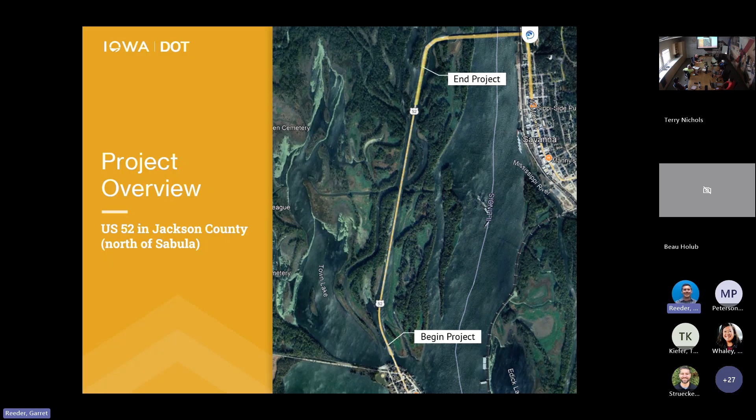Project length is about 9,500 feet long, and we have water on both sides of the roadway, and that water depth really varies throughout the project limits. We did do a bathymetric survey early in the design phase to figure out what the water depths were, and those varied from a few feet to several feet deep in spots. It's not very consistent whether you're on the east or west side of the roadway, or running north and south. A lot of variability in water depth, so just want to point that out as we talk through constructability. That's something to keep in mind.

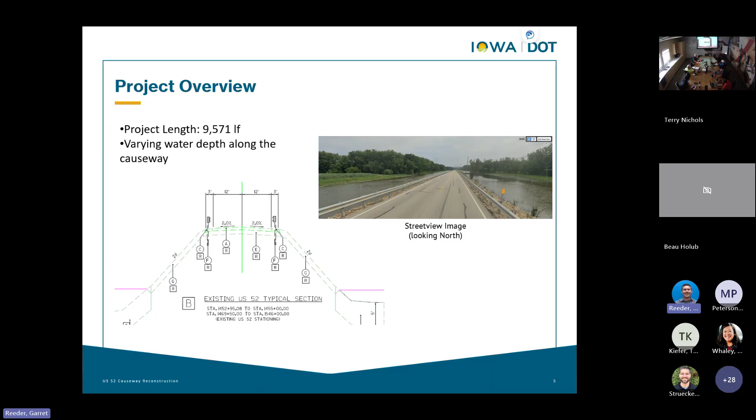With this project, what we're planning to do is widen out the causeway. Thinking back to that existing typical section, there wasn't much shoulder out there—we're going to widen things out to accommodate full 8-foot shoulders, replacing the pavement with full depth 10-inch PCC with full depth shoulders as well. To accommodate that widened embankment, we're going to use a lot of Class B revetment as the foundation, which will also help armor the fore slopes for any wave action or erosion based on water levels.

This typical section was included as part of the meeting invite, so feel free to open it up on your screen. I'm not going to run through every callout on this typical, just going to give a few highlights to spark some discussion later in the meeting.

We have 10-inch PCC pavement with full depth shoulders on this project. We're proposing a 12-inch modified subbase underneath that pavement, with geogrid underneath that subbase, and 12 inches of cement stabilized subgrade beneath the subbase. So we're trying to beef up the typical section a bit to provide a solid foundation for that pavement.

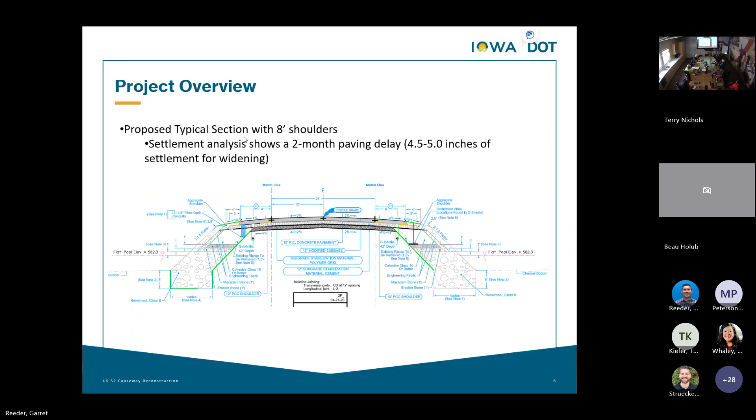This conduit trench detail was included as part of the meeting notification, so feel free to open it up to look at a few more callouts. Our thought was to get that conduit trench constructed first, allow the utilities to pull the fiber, and then the contractor would be able to work on widening the east side of the embankment by getting those poles removed. That's how we're currently proposing to address the utilities on the project.

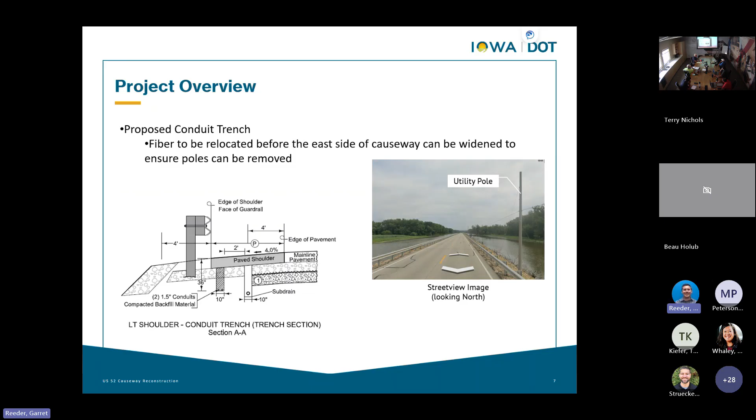And because of the length and the widening that needs to take place, we're looking at some pretty substantial quantities on the project.

Some of these quantities have already been posted online, so some of these items might not be a surprise to a lot of you, but some notable items we thought would be useful to share today: we're looking at about 124,500 yards of waste on the project, 92,500 yards of contractor furnished embankment in place, 331,000 tons of Class B revetment, which is really the foundation for the widening of the causeway we're going to be constructing, and then 44,000 tons of erosion stone.

Our pavement quantity is currently estimated at 42,500 yards, including full depth paved shoulders. Based on our current staging layout, which we'll share shortly, the temporary pavement quantity is about 8,500 square yards to accommodate traffic during construction. Please keep in mind these are preliminary quantities, but we feel they're pretty representative of what we're going to bid with.

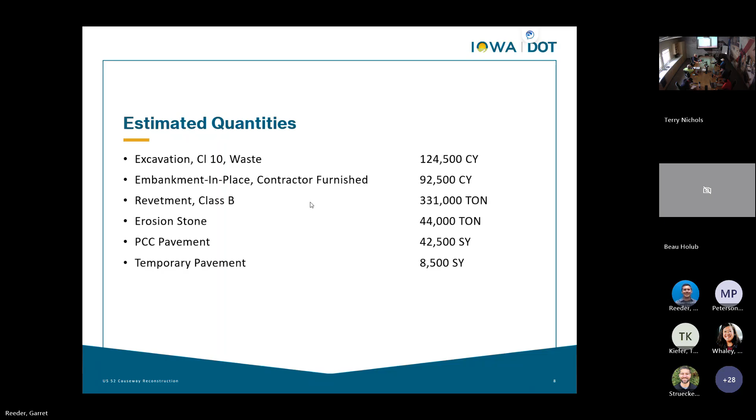So the schedule for this project, like Jesse mentioned earlier, we're proposing a December 2025 letting, which is coming right up. Our design team is in the midst of final design, so any feedback and discussion we get today, we're going to try to incorporate as much as we can into those final plans to help make improvements to the design and constructability of the project.

We've spent quite a bit of time as a design team and DOT team talking about how this project is going to be staged. Right now our current proposed construction durations are looking like 120 working days for grading and 60 working days for paving. That's the current schedule for the project.

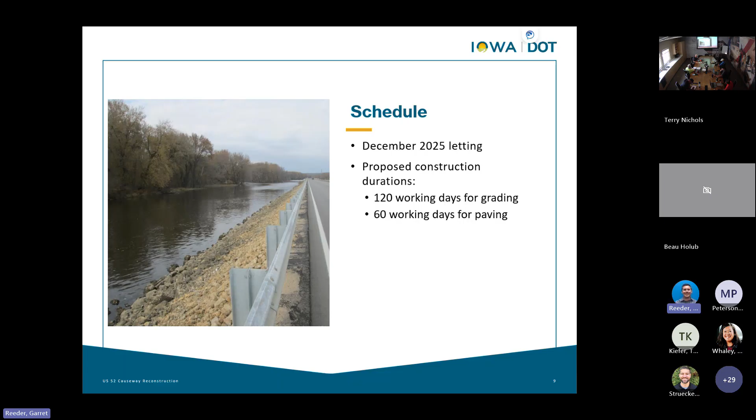And with that, I'm going to turn it over to Tyler at Parsons, and he's going to walk us through a staging overview for the plans. So Tyler, you want to take the screen? Sure, let me grab it real quick here. Okay, let me know if you got me. Yep, we can see it.

All right everyone, so as Garret mentioned, we're going to go over the staging of this project. We have a 2-lane roadway, 1 lane each direction. The main goal of this staging is to keep 1 lane open at all times for traffic to get around. The whole project is 9,500 feet long, so we're looking to substage this into 2,500 foot work zone sections. That way we can go in 4 sections on each side as you go down the causeway, with temporary traffic signals to allow traffic to go around the work zone and keep the contractor working throughout the project. As we go through this, Mark or Garret, please jump in with comments as needed.

We broke it up into 2 phases. Phase 1 is all the earthwork and embankment, basically getting all of the widening done. Phase 2 is all of the pavement work on the back end. The reasoning behind this, as Garret mentioned previously, is that settlement we're working with, and to avoid any settlement issues, we decided to get all the embankment on the outside widening done first. That way we can come back and have everything settled and be able to pave and open lanes on both sides with the shoulders and a lane done at each time, so we're not blocking ourselves in.

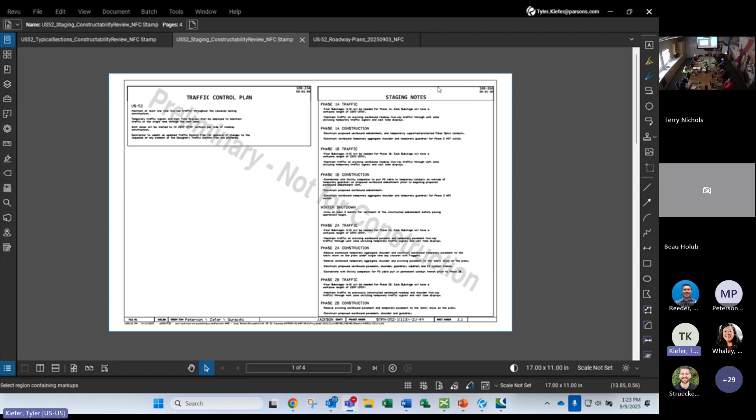So with that, it's a little overview. Let's go through some of these typicals of what each of these phases looks like. So that's the existing, what we're working with today, as Garret mentioned.

In this first phase, with the utilities on the east side, we want to get the west side built out first, so those poles can stay out there as long as possible, so we can switch over once we complete the widening. In this first 2,500 foot segment, this is what the typical section would look like. We'll put traffic on that right lane and have the temporary traffic signals work around the work zone. Through this phase, we are going to build all the embankment on the outside, all that revetment, the widened shoulders, and get it all set up for the paving in phase 2.

With that, you can also see we have the option to install the fiber optic conduits on the outside of the temporary guardrail. That way we don't have to construct the conduit trench and avoid any settlement issues that would come with putting that in too early. So we'll get the conduits on the outside there above grade, and that would allow the utilities to switch the fiber optics onto the west side before we switch to the east side.

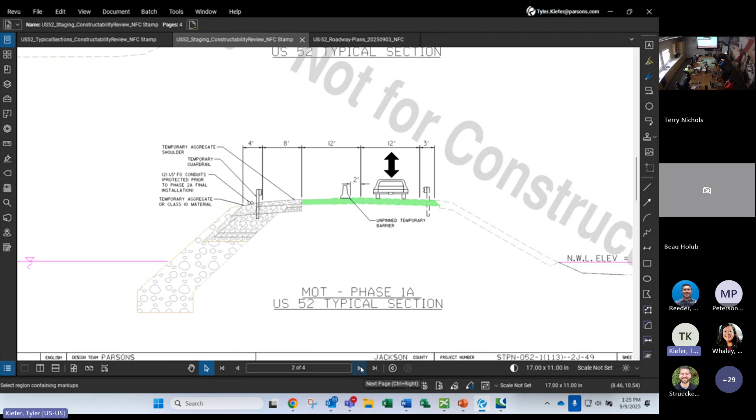So with that, we'll go to the next phase here. As you work your way down the causeway, once the whole west side is done, we'll flip over to the east side, and similarly, we'll do the east side embankment, build all that out, and put all the traffic on the west side.

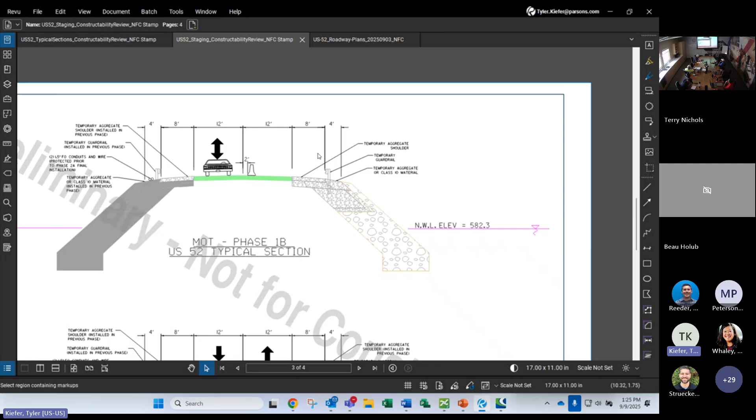And with that, the fiber optic conduit and wire will be pulled onto that side, so the fiber optic service will not be disturbed, and traffic will be running on that side through those short work zones.

And then, depending on how the schedule works, we have a winter shutdown in here to allow for that 2-month settlement. There'll be some settlement plates within the embankment so we can track to make sure we hit the necessary settlement in the embankment on either side before we pave.

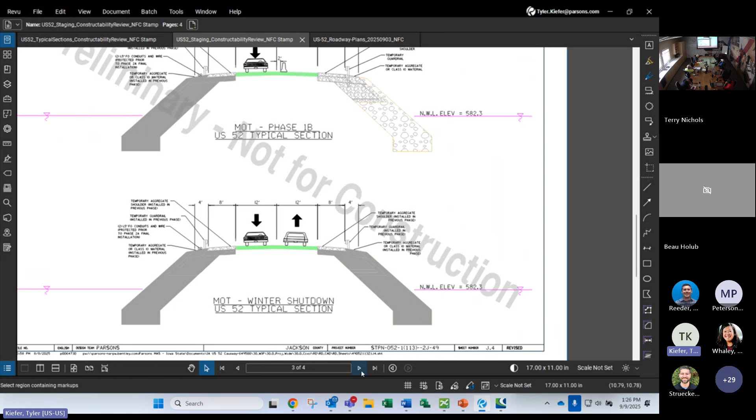And then phase 2 will be all the paving work, and this is where the temporary pavement comes in. So in this first half of the phase, we'll flip traffic back onto the east side, and we're going to pave the west side, both the shoulder and that lane, all in one stage here, as well as include the proposed guardrail and conduit trench.

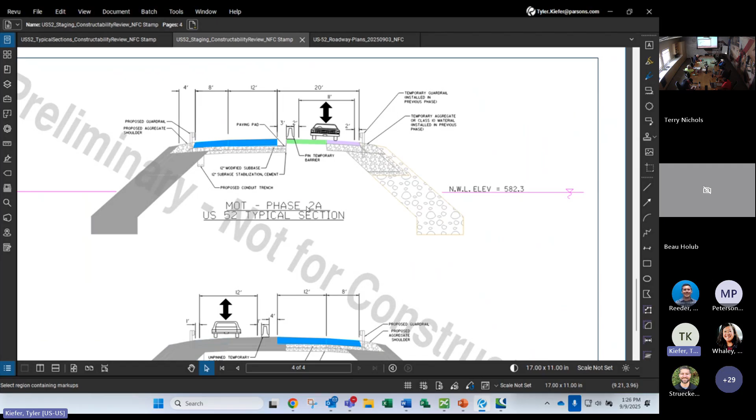And with that, after that phase, we will switch it back over to the proposed side, and the same way, we'll be able to pave the lane and the shoulder on the east side roadway.

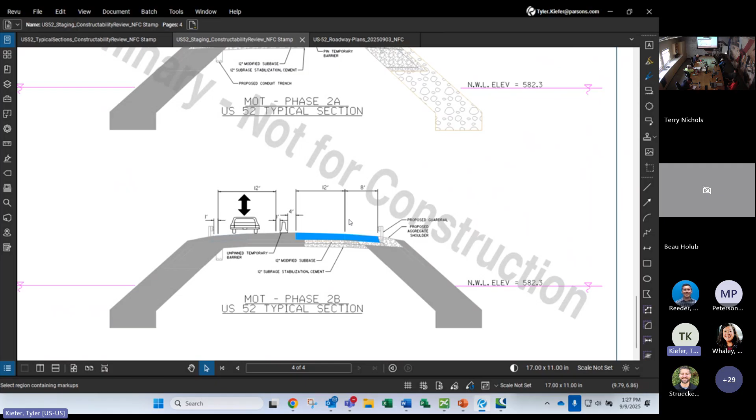So this is just a typical kind of section through the work zone. As I mentioned previously, our work zones are going to be limited to 2,500 feet with temporary traffic signals to allow traffic to continue through the causeway without any disruption.

With that, Garret, Mark, if anyone wanted to jump in or if anyone had any questions through that, I'll toss it back to you, Garret. Okay, thank you, Tyler.

Okay, so we wanted to keep the presentation brief so that we could allow maximum time for discussion. This is where we're going to seek input from our contracting partners in the industry. We have 7 questions we would like to ask, and we're really looking for any feedback, comments, or concerns you have based on the information we've shared today.

We do have plan sheets available as well if we want to take a look at a few things. And we've got our district construction team on the call, and our consultant partners, the roadway designers. We have a lot of resources here that can help answer some questions as we're talking through things, but we're really looking for a lot of feedback and open discussion.

So what I'm going to do is read off the question, and then we'll pause for discussion. Once the discussion is ended for that particular question, we'll move on to number 2, and so on and so forth until we've finished up all 7 questions that we have.

Well, this is Andy, at Boomerang, and the thing that jumps out at me is there's only an 8-foot pad for the semis to drive on in stage 1, and then side dump over the road, over the embankment with their riprap or dirt, and that doesn't seem like enough.

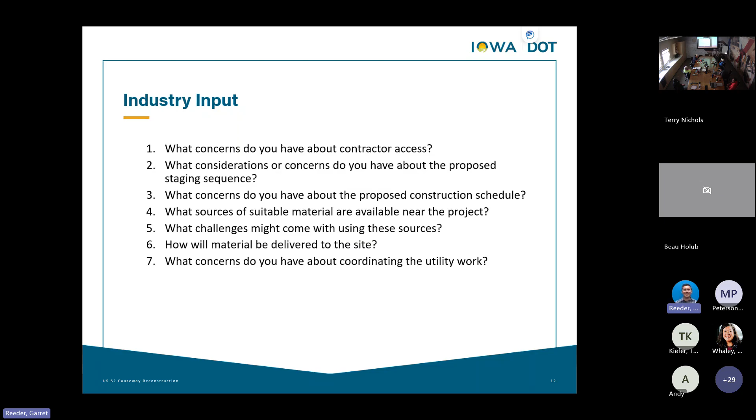Tyler, would you want to bring up those staging plans again, maybe?

Right there in phase 1A, you've got a 12-foot lane, and you're taking 4 feet up with the TBR. So you really only have 8 feet of paved roadway there for semi after semi, side dumping over the embankment if we deliver in semis. If we deliver in tandems, I don't know how they do it.

Any thoughts from the team on that comment? Which would really be a lot.

Maybe a question for you. How much room do you think you'd need for a side dump? What would be ideal? Oh, 10 to 11 if we don't break off.

So can we narrow up that driving lane from 12 to 10 or 10 and a half, or move it over a little bit closer to the guardrail?

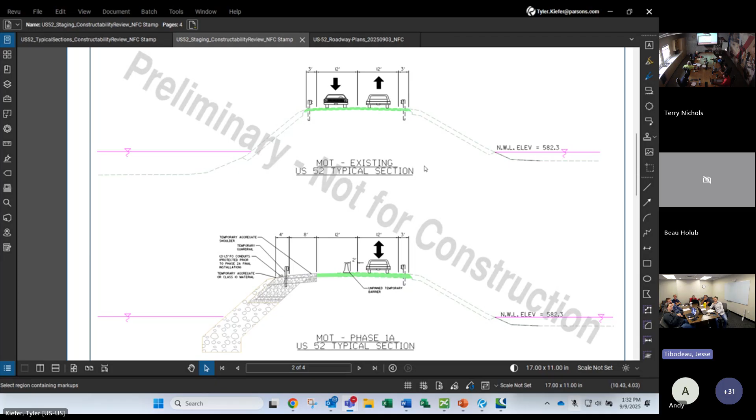Let's go to the next staging or cross section so you can see that. Go to phase 2, yeah, right there. It does show, I think, a 3-foot paving pad. But you're right, the only way to get in there is to back in.

Or only pave 12 foot. Well, even if you only pave 12 foot, there's still no room. Pretty narrow, whole road, and you can't get around your paver. Right, the ready mix trucks still won't get around the paver. Pretty tight area.

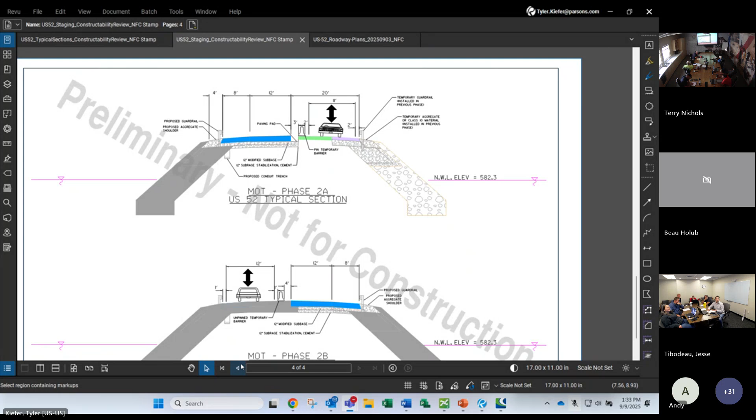Jordan, looks like you have maybe a comment or a question. Yeah, just curious which stage the waste dirt comes out, and where is the waste dirt? Most of that is going to be from digging out for this new embankment and digging off the existing.

So you mean it's going to be underwater? It's going to be pure slop? Yeah, I think you're going to scale that outside riprap, which is some smaller material, but then to get that toe for the revetment, yeah, that will be river bottom material.

Slop. So then you have the same problem getting the semis or the tandems back into the hole that's digging this out, and they're going to be mucking up the whole road because it won't be watertight.

Yeah, those are great comments. Can that existing riprap stay on site and just become part of the toe? You'd move down, even if you have to adjust your settlement timeframe a little bit?

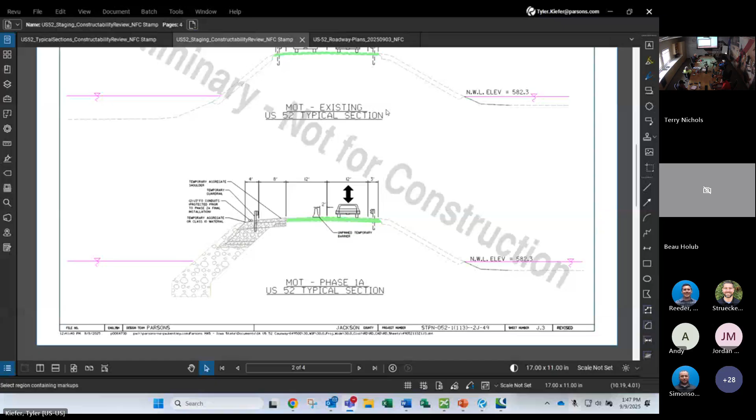Well, if you allow a rolling 2,500, it would be the best. Because you're gonna pave that in a day or two, and then what are you gonna do with the whole crew?

This is Dean Herbst with Cedar Valley. I guess I know it's been mentioned, but I don't know if I quite followed the response. With the bridge work that's been done, it sounds like it's been closed before. And I don't know if there's some concern about having some closures, but is there an opportunity to have it closed down some? Because for the paving, that could really help that process at least. I don't want to speak for the grading part, but is that an option that's still under consideration, or has there been commitments made that wouldn't be done?

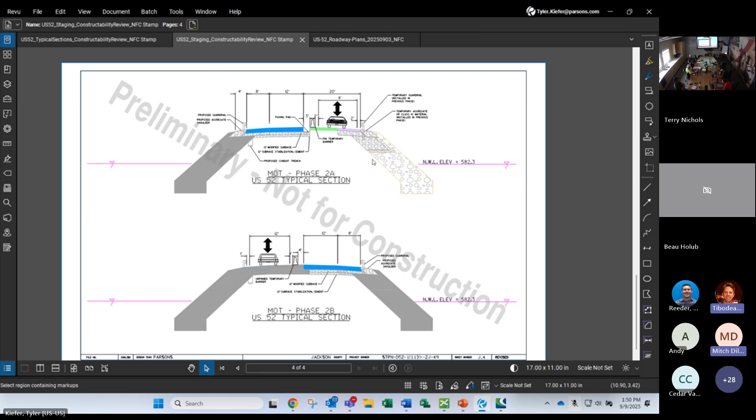Hey Jesse, this is Mitch. Having lived through that closure and the ferry and all that stuff we did, this is their season for tourists. But I know they had, like, during the middle of the week, a Tuesday, Wednesday - to me, that'd be something worth looking at. You probably wouldn't want to do a Friday or Saturday, but I don't know how long it would take to pave. This thing's 1.8 miles, so that's roughly a little less than half a mile, how long you could do a section if you got away with closing it. That takes care of everything.

Yeah, that's a good comment. We can take a look at the days too, because you're right, with the river town, especially this time of year, weekends are a big deal. I mean, this is probably really stretching it, but maybe like Okoboji, you just couldn't do it during the summer.

Mitch, how would you address cure and pavement edge drop off to have it closed, you know, for 2 or 3 days at a time? What would that look like? Well, if it's closed, I guess I'm not following. If it's closed - well, you're saying closed for only midweek, right, and then open over the weekend? Monday through Thursday. So we'd have to address pavement edge drop off and cure in that time frame. So trying to figure out, what does that look like? How do we do that?

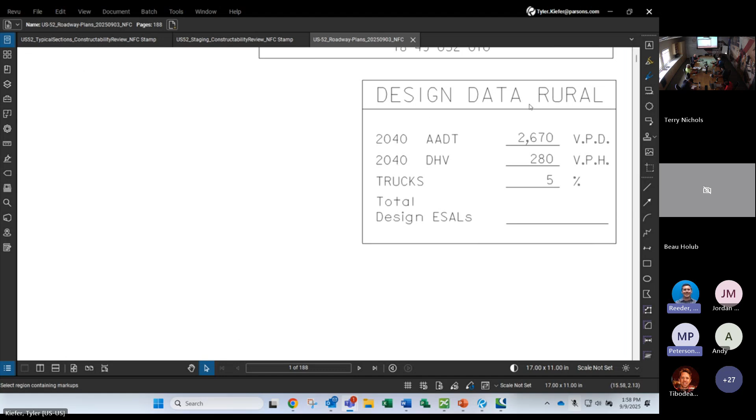What are the vehicles per day on this causeway, normally? Mark and Tyler, do you guys have that info handy? I don't have the plan set pulled up, but yeah, I think it's 2,500 existing, proposed. I think it's all about the same. There it is, yeah, 2670.

The other thing you have to think about too is those trucks are going to have to turn around at some point, depending on origin and destination, where they're coming from and where they're going. So something to keep in mind there as well.

Any other thoughts about material delivery, challenges with bringing that material to the site, production rates? Obviously these are all good comments we've already received. Is there anything else we're maybe missing, things we could try to do to the plans to make it a little bit easier to construct, more cost effective? Have you thought about taking all the widening to one side?

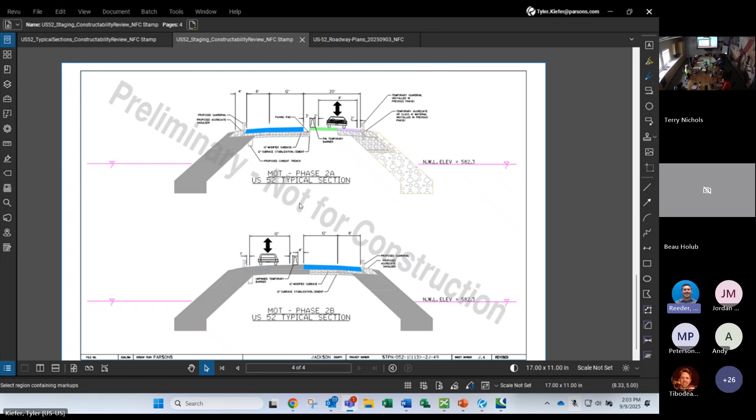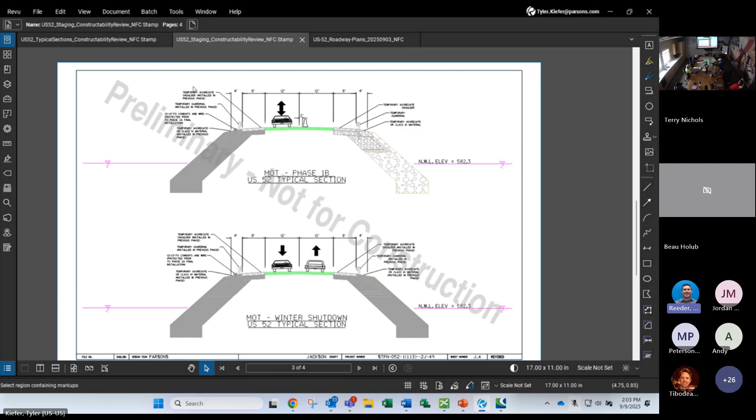Well, we can all keep simmering on the material delivery, material sourcing topics. But the last question we were hoping to gain input on is what concerns do you have about coordinating the utility work. So we talked about the existing utility poles along the east side of the causeway that need to be removed so we can widen out. We're proposing some temporary conduits along the west side - Tyler has that pulled up there on the sheet, the call out on the left side of the screen. Then we're proposing a conduit trench underneath the paved shoulder along the west side, and that's where the fiber will go permanently upon project completion. So any concerns anybody has about coordinating the utility work?

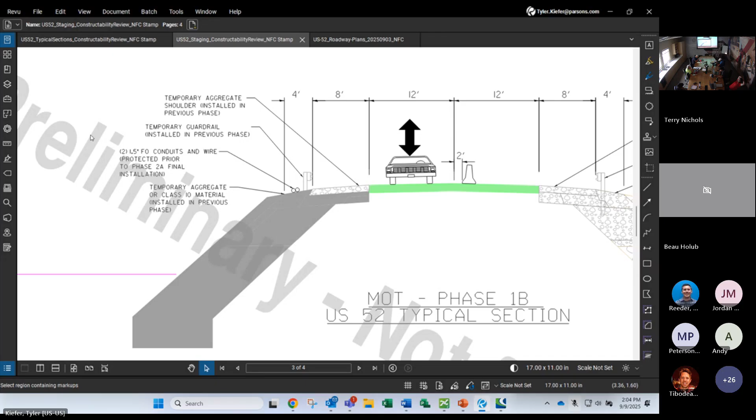We have been in discussions with the utility providers, and they're on board with our current plan. It'll take some coordination during construction, obviously, to make sure they get in there and pull that fiber when necessary.

And George, remind me, I think we're dealing with - is it Windstream on this one? Who are the two utility providers? Is it Windstream and Mediacom? Garrett, I think that's my recollection. Tyler? Okay, same? Yep, that's correct. Okay, thanks. Yeah, sorry, we were muted. Go ahead, George. Yeah, you're right, Garrett. Okay, perfect, thanks guys for confirming that.

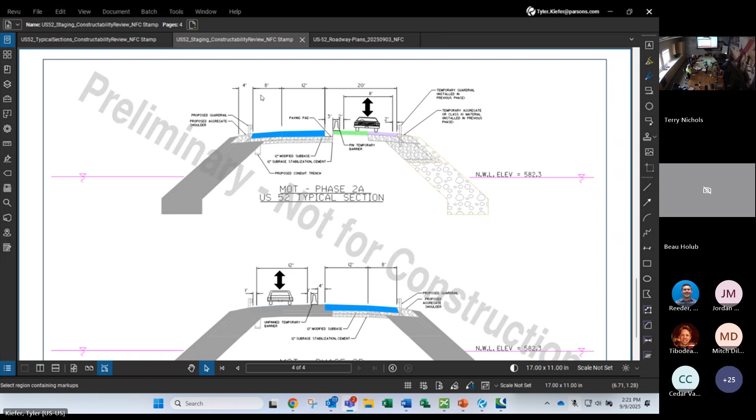All right, going once. Okay, Jesse, any final comments before we adjourn?

No, just thank you, Mark and Tyler and Garrett, for the presentation and the hard work to get to this point. So we'll take a quick look at this tomorrow, Mitch and others, and try to incorporate as much of the feedback as we can. So appreciate it. Yeah, in the meantime, tell Danielle I'll read the spec book a little closer.

Yeah, supposed to read that? Mitch, yeah, I was surprised with the edge of shoulder too. Well, I think at one time if you had 10 feet you were okay, but I don't know. It doesn't say, I didn't find that anymore, because I would think that width of shoulder would matter too. I agree. Yeah, oh, things change. You can have exceptions.